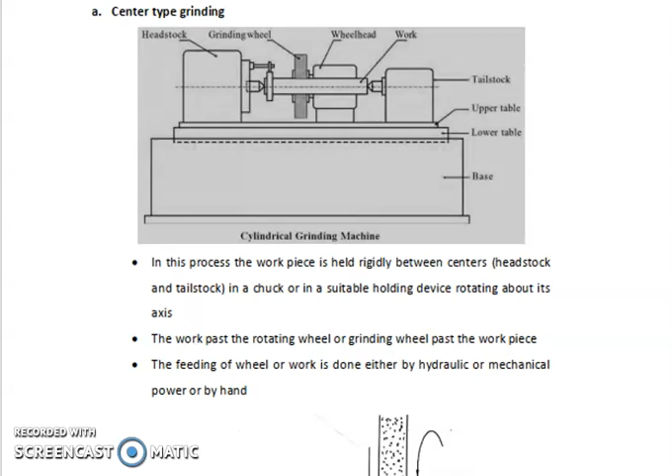Then we have another term, plunge grinding. Plunge grinding means that if the width of the grinding wheel face is compared with the length of the work, and the width of the wheel face is more than or equal to the length of the work to be ground, then the wheel may be fed in with no traversing movement. This is known as plunge grinding.

That means since the length of the workpiece is less than or equal to the width of the grinding wheel, transverse movement of the workpiece is not required. This is plunge grinding. Otherwise, if the length of the workpiece is more than the width of the grinding wheel, then transverse movement will also be required.

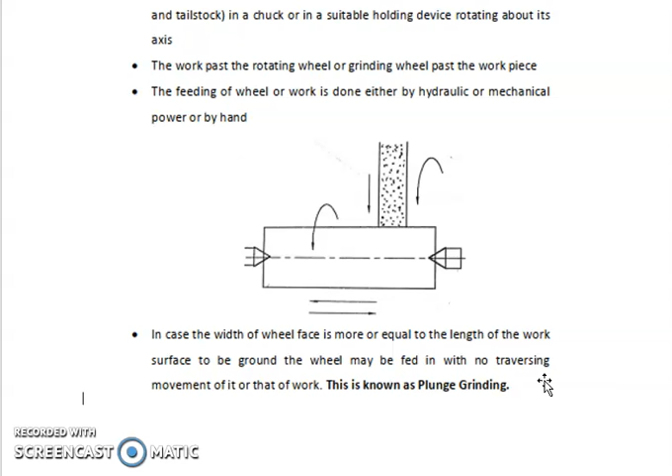The wheel head is generally mounted on the horizontal crossways on the bed and travels along these ways to feed the wheel to the work. This movement is known as in-feed.

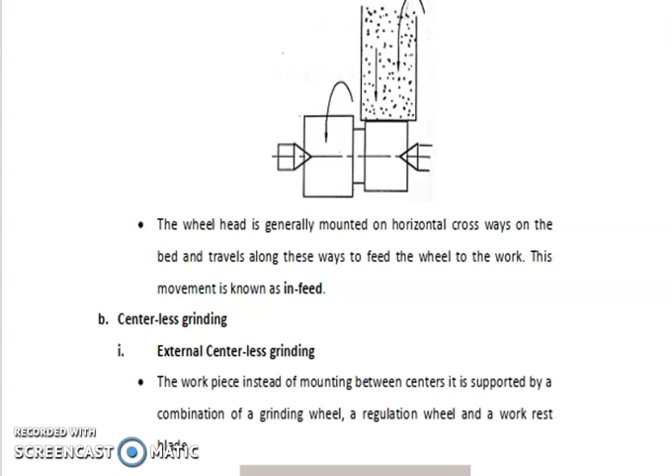Now next, starting with centerless grinding. Centerless grinding is the same grinding technique, the only difference being that the workpiece to be grinded is not held between the centers; some other way of support is provided.

I repeat, the workpiece to be grinded is not held between the centers, as we saw in the last slide where the workpiece was held between headstock and tailstock. In this case, grinding proceeds in the same manner, but the workpiece is not held between headstock and tailstock; some other means or movement will be used.

In this diagram we have a grinding wheel which rotates about its axis, and a workpiece, but now it is not held between headstock and tailstock. Instead it is given additional support through a work rest blade. We also have a regulating wheel, which rotates in the same direction as the grinding wheel.

The regulating wheel basically provides support and simultaneously assists in the feed movement. Support is given at this side by the work rest blade, and simultaneously the movement is accomplished as per use.

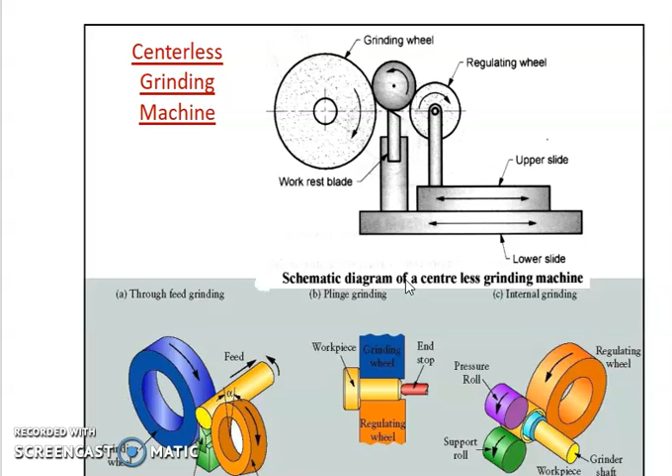We will now discuss the types of centerless grinding. One more thing: likewise as we saw in the classification of grinding machines dealing with external and internal grinding, similarly here also we can have external centerless grinding as well as internal centerless grinding.

In external centerless grinding, the workpiece, instead of being mounted between the centers, is supported by a combination of grinding wheel, regulating wheel, and a work rest blade. This was also seen just now in the definition.

So we have a grinding wheel and a regulating wheel rotating in the same direction. In between we have the workpiece and the work rest blade, and depending on the width of the grinding wheel compared to the length of the workpiece, we may or may not require simultaneous movements or feed movements.

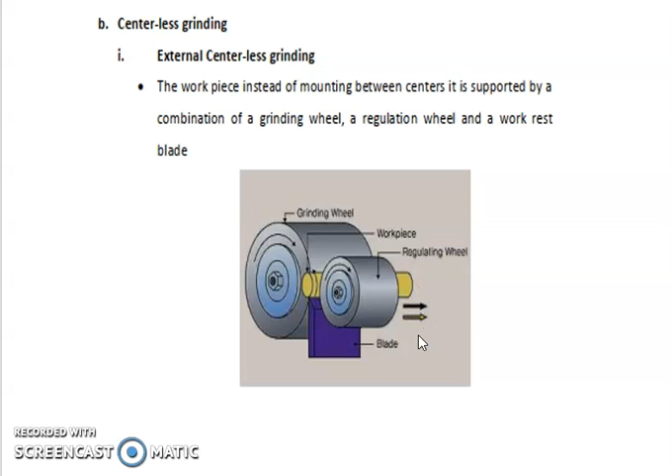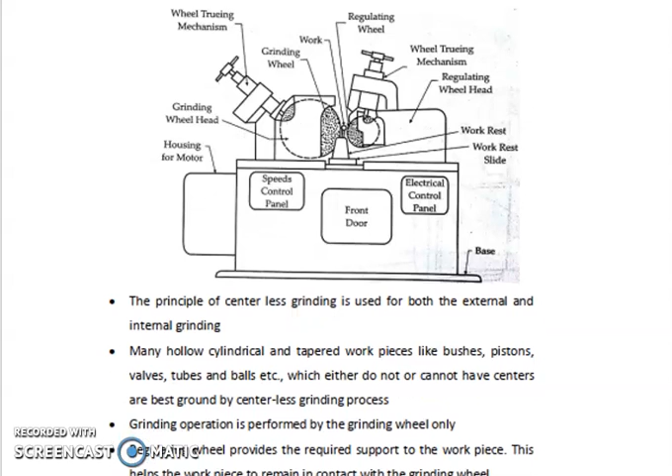So this is also the diagram for the centerless grinding machine. You can go through this diagram.

Continuing further on the theory, the principle of centerless grinding is used for both internal and external grinding. Regarding application, many hollow, cylindrical and tapered workpieces like bushes, pistons, valves, tubes and balls, which either do not or cannot have centers, are best ground by the centerless grinding process.

However, the grinding operation is performed by the grinding wheel only. The regulating wheel provides the required support to the workpiece, helping it remain in contact with the grinding wheel. In the diagram we saw, the regulating wheel was to the extreme right.

The required support from the bottom is provided by the work rest, as I explained. As the workpiece rotates, it rests on the work rest. The regulating wheel carries a rubber bond and helps in rotation of the workpiece due to friction, avoiding slippage and effectively helping in the rotation of the workpiece.

The direction of the two wheels, grinding wheel and regulating wheel, are the same, as we discussed before. Now let us discuss the types of external centerless grinding.

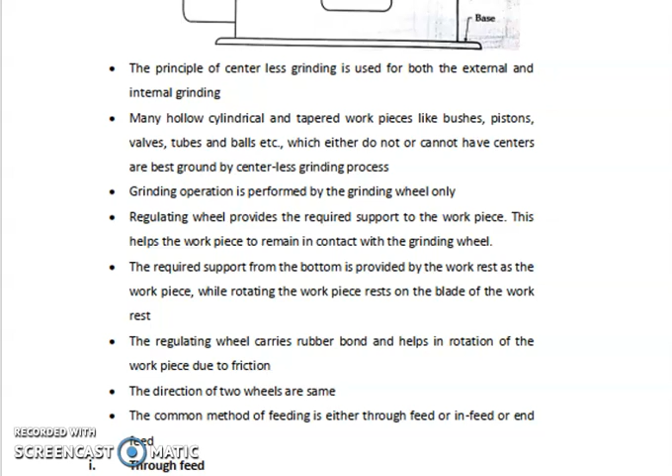First is the through feed. This is a diagram for the through feed. In this method, the workpiece is supported and revolved as usual, but is simultaneously given an axial movement by the regulating wheel and guides, so as to pass between the wheels.

That means in order to grind or machine the entire length, the workpiece is supported as usual, but simultaneously the axial movement is also given by the regulating wheel and the guide so as to pass between the wheel and the guides.

So, in order to effectively pass the workpiece between the guides, an angle is provided between these two, and the regulating wheel is inclined at 2 to 10 degrees with the vertical. This is used for straight cylindrical jobs.

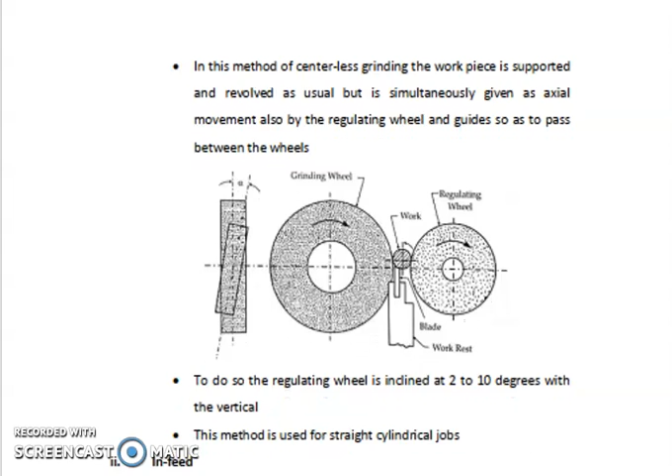Second is infeed. It is similar to plunge grinding, which I discussed earlier, basically when the width of the grinding wheel is equal to or more than the length of the workpiece. So it is similar to plunge grinding.

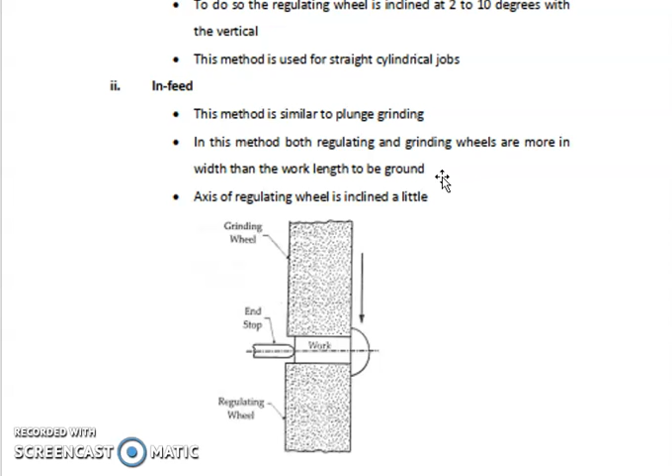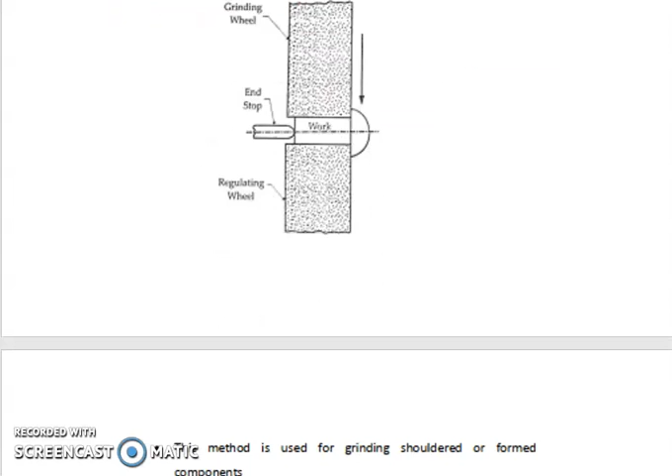Both the regulating and grinding wheels are more than the work length to be ground. The axis of the regulating wheel is inclined a little. This is the diagram; we can have an end stop so it can recognize that the required grinding length has been machined.

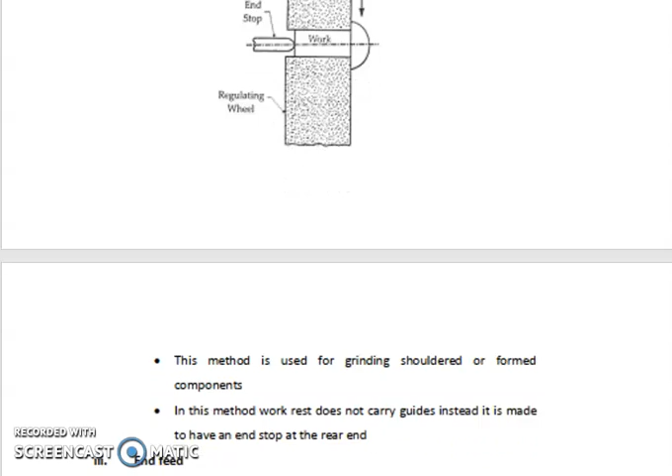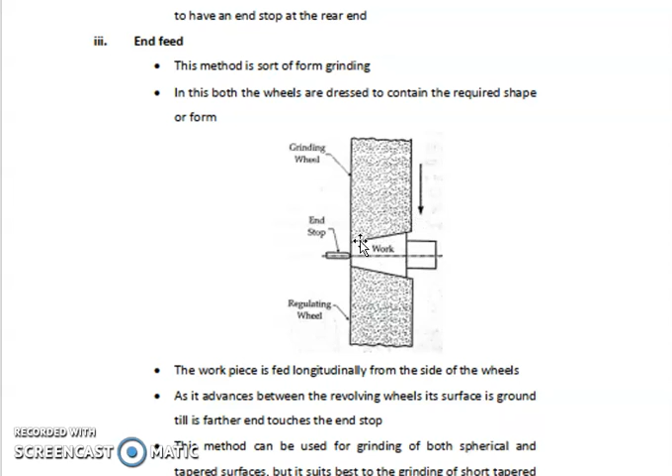Then the third type is the end feed method. Basically in this, we can have dressing of the wheel, please notice my pointer simultaneously, to contain the desired shape or form.

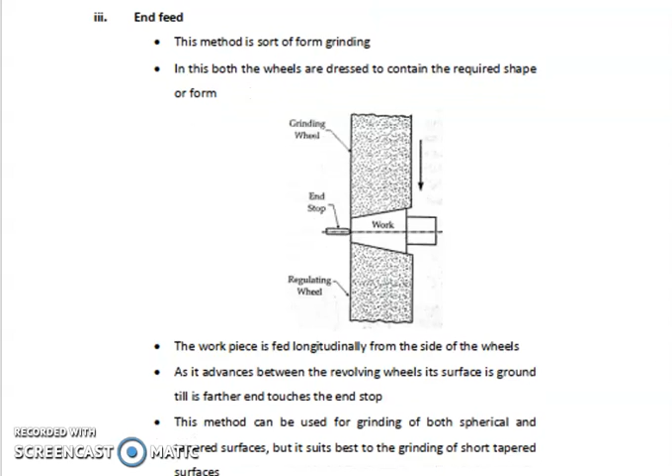Now regarding the feeding, the workpiece is fed longitudinally from the side. So when we want a particular tapered shape of the workpiece, we can have the dressing of the wheel in these two shapes, and the desired workpiece is fed longitudinally from the sides as it advances.

Between the revolving wheels, its surface is ground till its further end touches the end stop. That means we again have an end stop, so as to notice when the required length, the total length, has been machined.

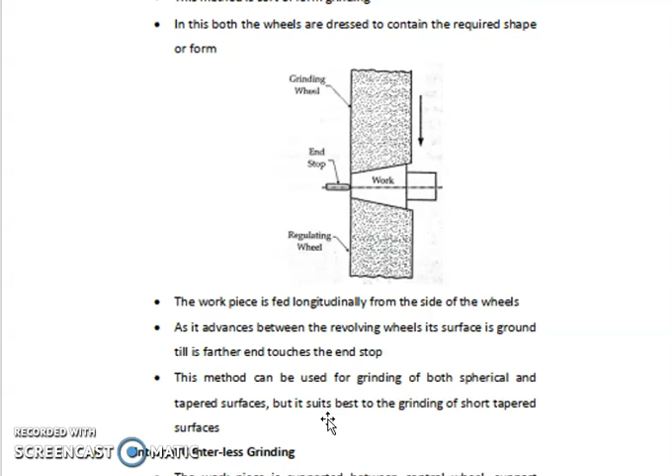Regarding application, it is used for grinding both spherical as well as tapered surfaces, but it suits best for grinding short tapered surfaces. This is all regarding external grinding and its classification.

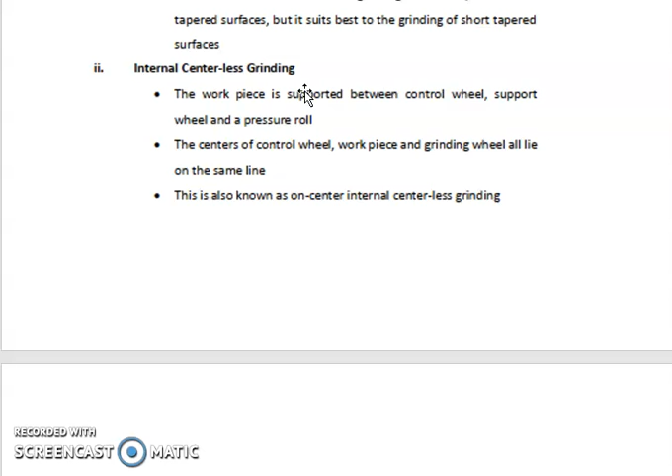Now the internal centerless grinding: the mechanism is similar, however there is a slight difference in diameter. With this we have a grinding wheel, a regulating wheel, and a workpiece, and since it is internal, in addition we will have a pressure roll and a support wheel.

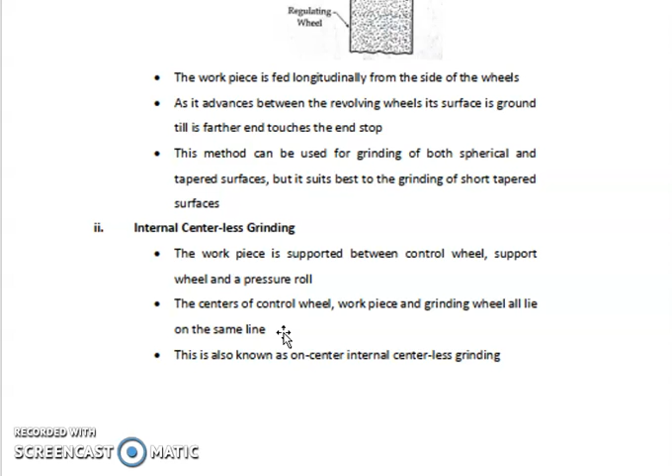So the workpiece is mounted between the control wheel, support wheel and pressure roll. See the corresponding diagram: centers of the control wheel, workpiece and grinding wheel all lie on the same line. This is what it means.

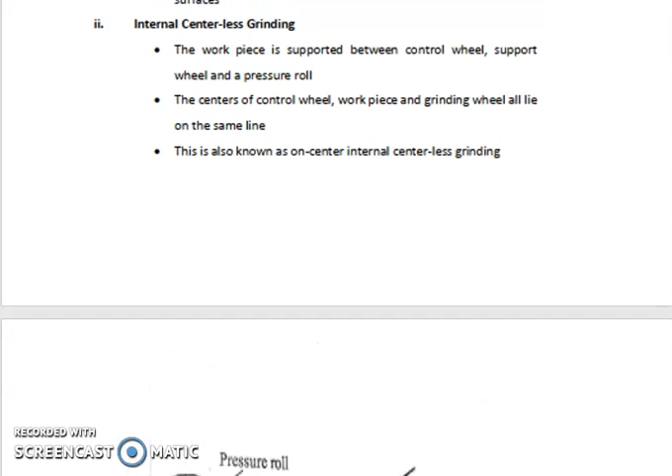This is also known as on-center internal centerless grinding. This is very interesting and very simple regarding centerless grinding.

So first we discussed center type grinding, then centerless grinding, the difference between the two, the types of centerless grinding - external and internal - and then the types of external centerless grinding along with their corresponding applications. I hope it's clear. Thank you.